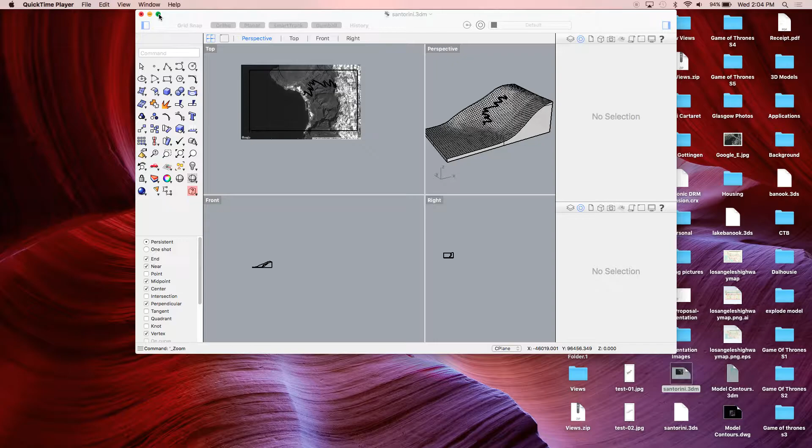Okay, may as well get started here. Did anyone have problems yesterday with their terrain, or did they make their terrain? Anyone? Yeah, it works, ish. We made something, we don't know if it's right or not.

There was another point I should have mentioned too, that might have helped your terrain be a little more accurate. Just to get those edges coming down properly, you could copy all of your points down, whichever increment you have for your elevation changes. Copy them down one more time so the points go down like that instead of just from there to there, because then it has more of a path for the actual patch to go on. So if your patch wasn't working out properly, just try doing that.

For this one, I made a simple model of Santorini because it has quite an elevation change. I put a path in there just so we can see how to move the path into the Illustrator file for the laser cutting.

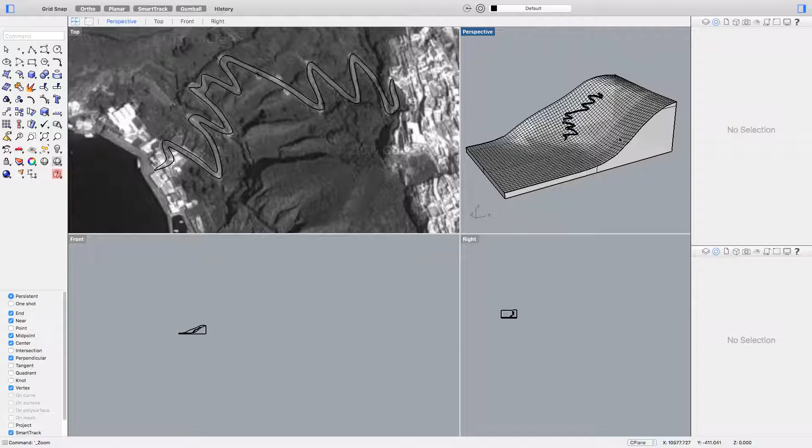So first, we're just going to do the manual version of it for this elevation change. Obviously I'm going to make it as simple as possible, so you'll get fewer actual stacks of material, but when you do yours, keep in mind it's probably not great to have huge changes in between your material if you have really thick material.

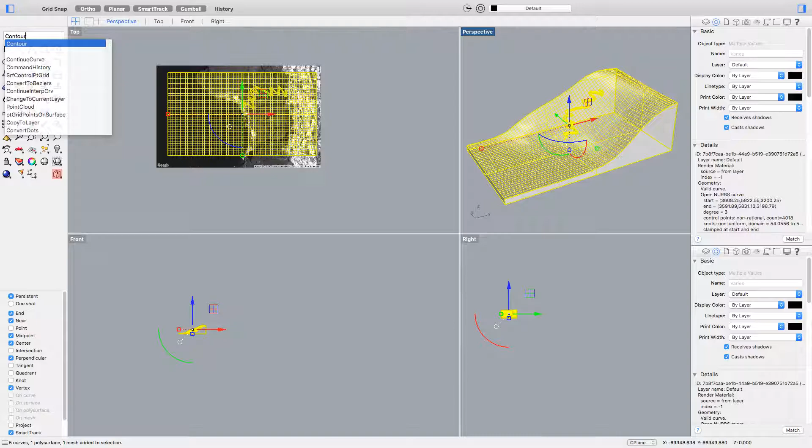So just like yesterday, pull the contour command out, and put in the direction, so you're going from top to bottom or bottom to top. I'm making these at 1,000 millimeters. We can change the scale in another program. I'm just loosely going off of what I know this model is scaled at, so that we can pull off curves into Illustrator.

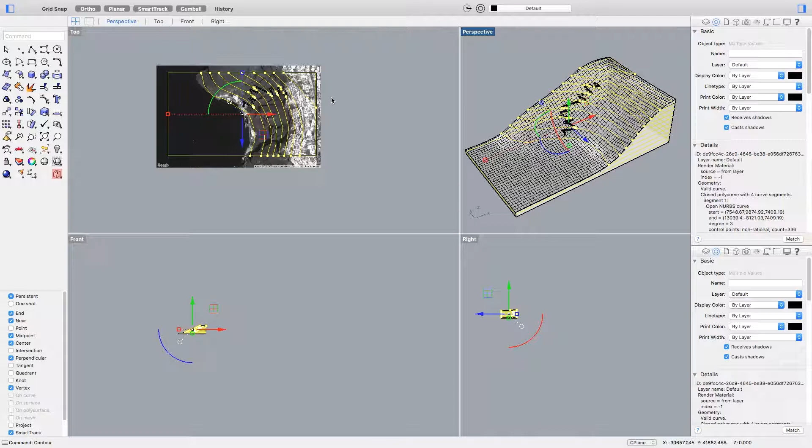Now I have each of the contours, which I'll move over using the gumball. All of these contours have now... okay, never mind, let's try it again. Did it just crash? It just crashed. Not sure why, I'm also using the trial version and it's kind of shitty on Mac.

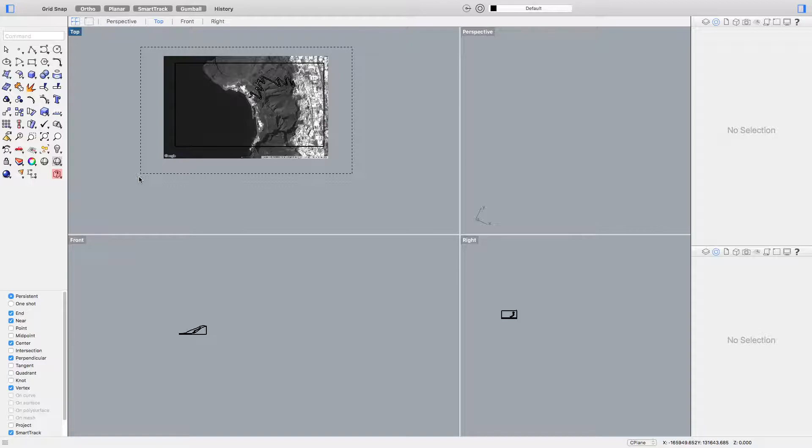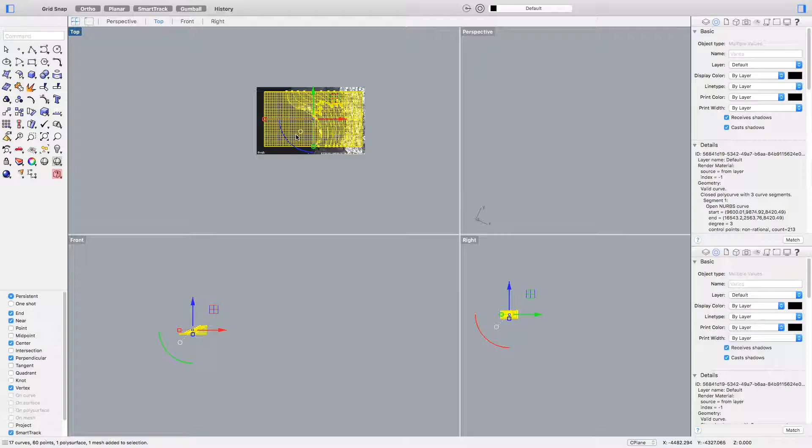Okay, contour. Oops, oh my god, that's gonna be bad. Sorry. Okay. One more time. Did it work? Yeah, okay. Have a bit of time.

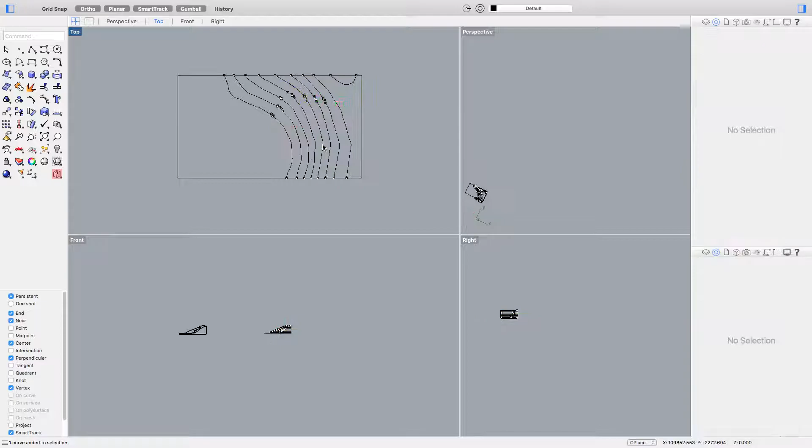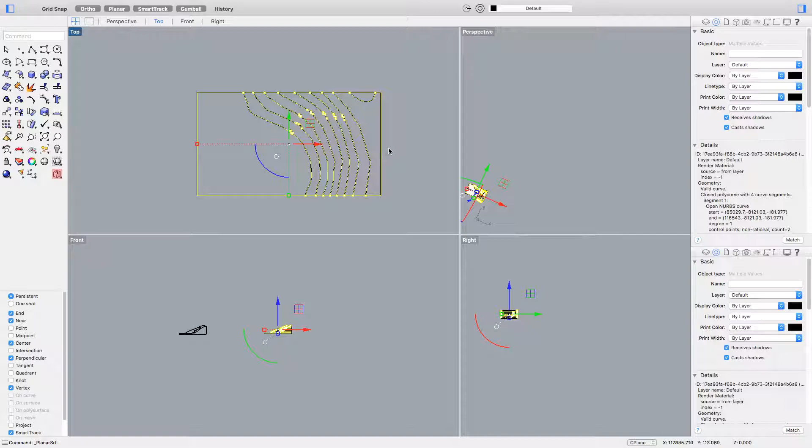Alright, so now we have all of these contours in their separate pieces. In order for me to take this little pathway I've created and project it onto these pieces, right now they're just lines and curves, so there's nothing to project onto. So I'll select all of these contours and change them into an actual surface. If you go to Surface and Planar Curves, it changes all of these into separate surfaces.

So then if I take this curve and move that over the same distance, I can project this. Now when I project this, the only problem is it's going to project this line work onto every single one of these layers, which we don't necessarily need, but in the end it will help us line everything up. So, project, select all of the surfaces again, and you can see it's projected that road onto each of these separate surfaces.

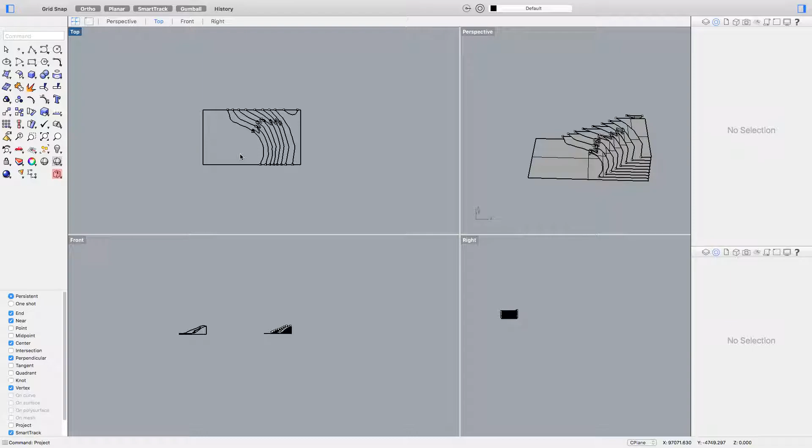So now essentially we have each of the pieces that we're going to be laser cutting. It's not that hard to move each of these because there aren't very many, but if you have a file with a whole bunch of contours, there's an easy trick to spread them all out so you can actually use them, which is the shear command.

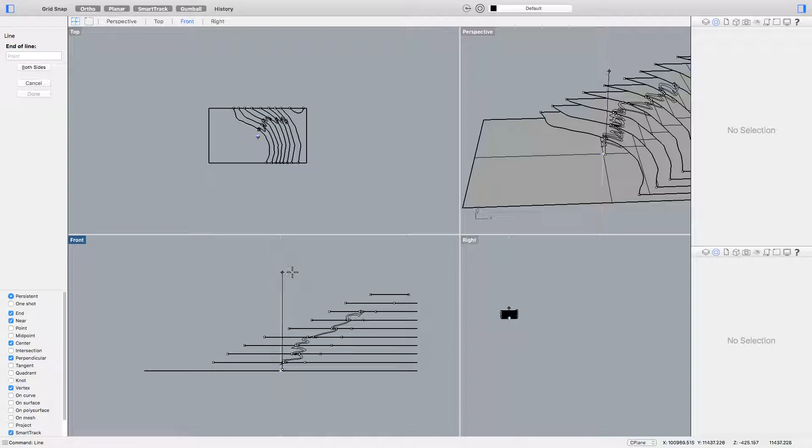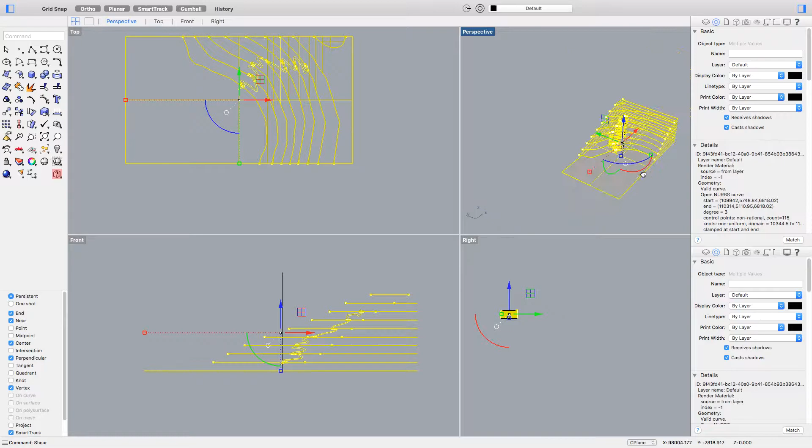But first, just draw a line from somewhere in the center of the project, straight up, and then grab everything but that line. Type in shear, and grab the base of that line we just created to the top of it. Oops, sorry. Oh my god, okay, this thing's a little finicky. So let me try that again.

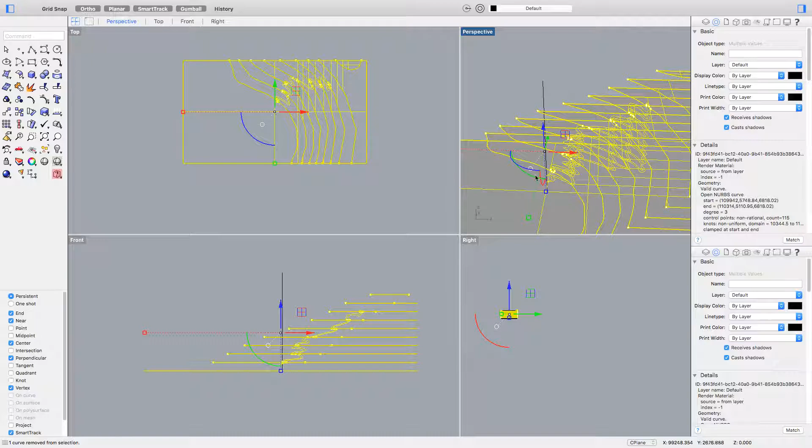So what this command is going to do is take everything on each of the z-axes and spread them all out. So as long as everything is on a level plane, it should spread all of your separate pieces out.

There we go. Okay, so that's just the curve. This one's the one that we used before, but we don't need that.

Now you can see each of your panels that we're going to be cutting. This is the most basic way that you can spread out all of your pieces, and then we can start laying them out onto whichever format of material you guys are using.

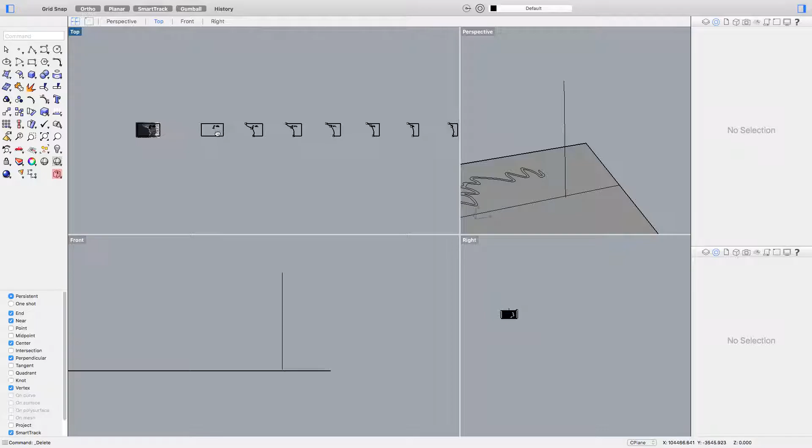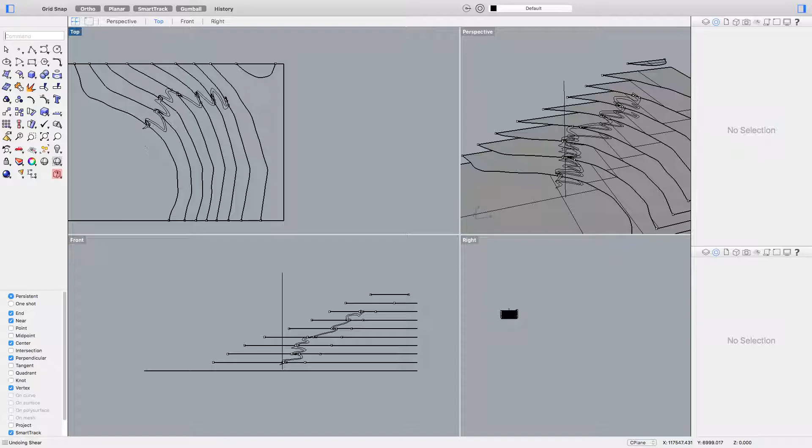One of the things that would probably help you guys out is, I know a lot of you talked about putting reference points of where each of the layers stack on top of one another, or even if you don't want to take this whole piece and cut out the entire piece, and you want to kind of hollow it out underneath, just go and project these lines or these curves onto the surfaces below.

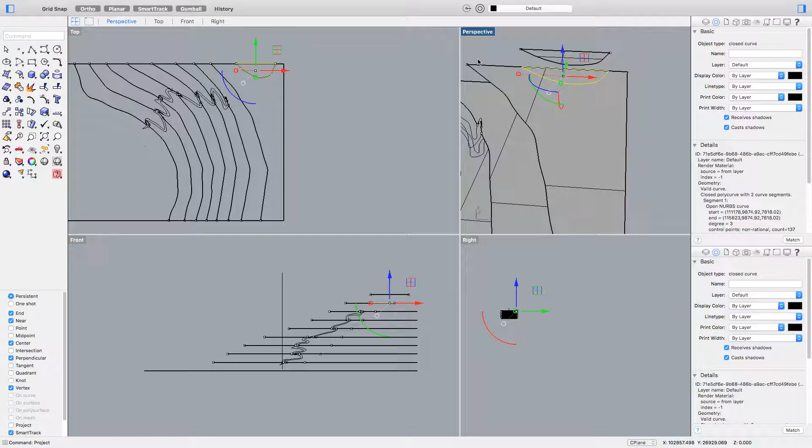So then once we actually get into the file on Illustrator of all of these, we can change these layers and just do a slight laser etch instead of a cut through the entire piece.

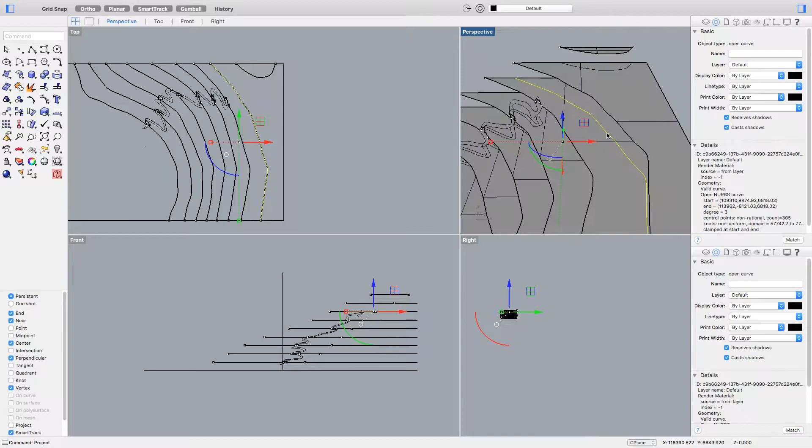So if you were to go down and do that, you can keep going down and do that on each separate layer. I don't want to do that because it's time consuming, but you guys get the point.

Does everyone know what I mean for that? Yeah, okay.

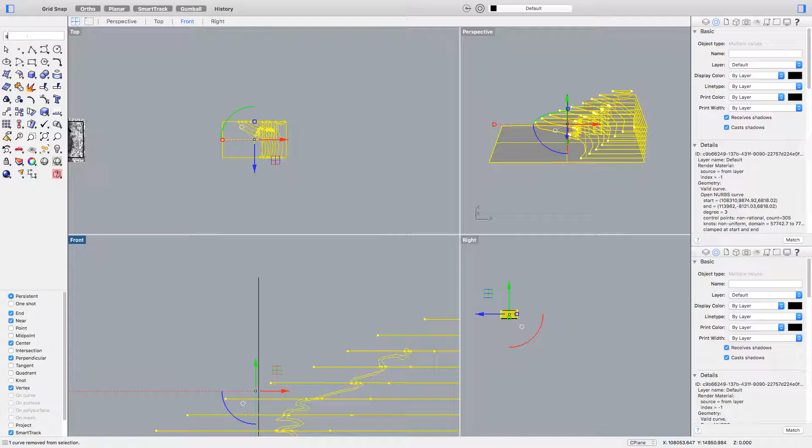So we'll just spread those out again. When you do the shear command, does it keep it at the same Z height? Yeah, it keeps at the same Z height, which won't matter when we export this to Illustrator. It just flattens it anyway, so that won't matter.

Okay, I see. Yeah, so it doesn't warp your line work or anything, unless your line work is going down the z-axis, which we can see that one path was actually going down the z-axis, so that was all warped, but we don't need that.

So we have this one, which will allow us to place, and this one, which we can place. So if you guys want to actually do that with your models, that's one of the ways that you can.

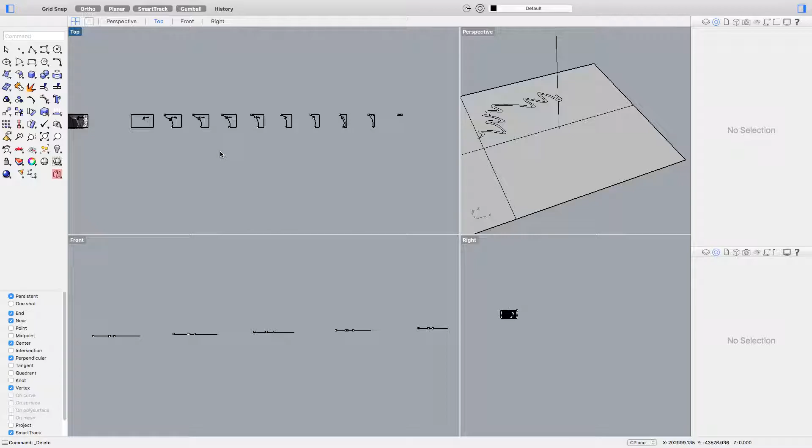You can do it one of two ways. You can start laying out, people lay out and just make their framework for their material here and start placing each of the pieces. I prefer to just do that in Illustrator, but however you want to do it.

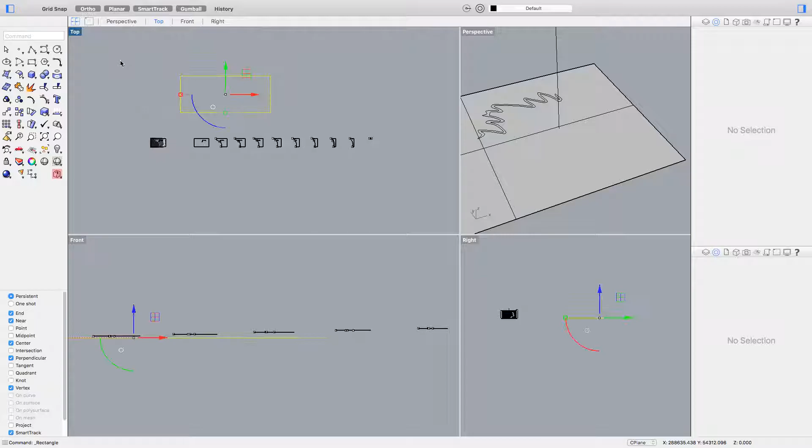So I'm just going to go and export. It's different on this guy, but if you can export the selected geometry, there we go. And we want to export it as an AI file for Illustrator.

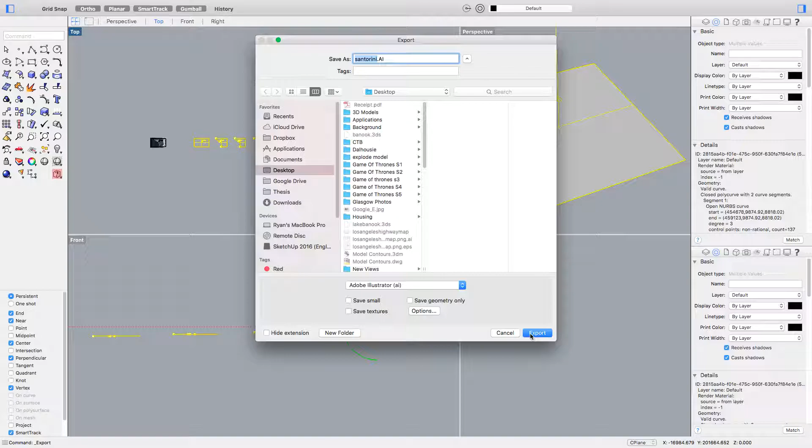And we want to keep the same scale usually. Well, you want to scale it in your head. I haven't scaled any of these, I'm just kind of guessing all the numbers, but typically I'm going to scale it for the type of model I'm making. So if I'm going to make a 1:1000 model, I'm going to change it so that there's 1000 millimeters, or whichever it is.

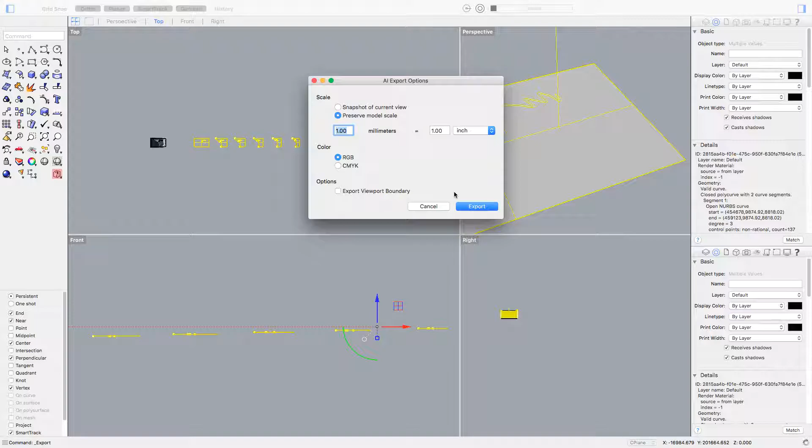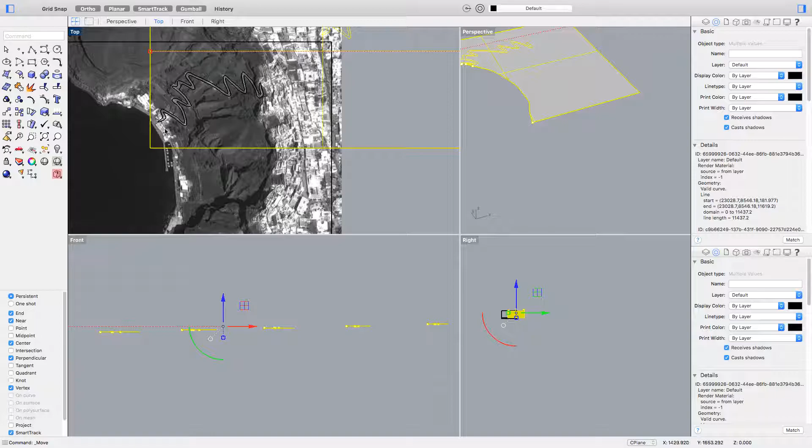Also, one thing I find about doing it this way is that you should probably put the panels closer to the corner, just the bottom left corner, because otherwise it'll disappear somewhere on the artboard in Illustrator and you can't find it. So if you just go move and then move that to 0, 0, 0, 0, 0, then that's the true 0, so it's going to actually export in the correct place when you go into Illustrator, because it does float off the page.

And you may even want to take some of these panels just so it's not extending across the page, because Illustrator also doesn't like that. Okay.

Anyway, so we'll just export that. So you guys got that export selected?

Okay, so then if we just head into Illustrator and open up our file that we just made.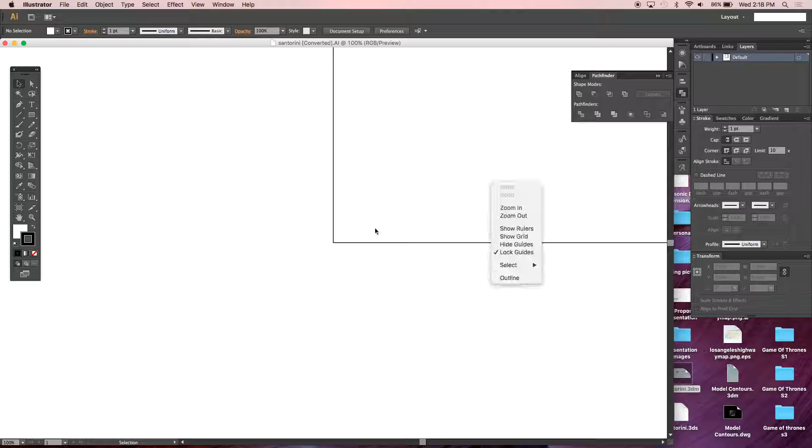As you can see, they're enormous, so we're gonna go back and export something else, because this probably isn't going to work. Well, you know, you can always try and scale this down in Illustrator, but it'll always say that it's gonna fall off the artboard. So you pretty much have to go back into Rhino and redo the scale.

Hey, it works for you. No, I don't think it did. Okay. No? No. Okay. Yep, so let's head back in here, and we are going to rescale this.

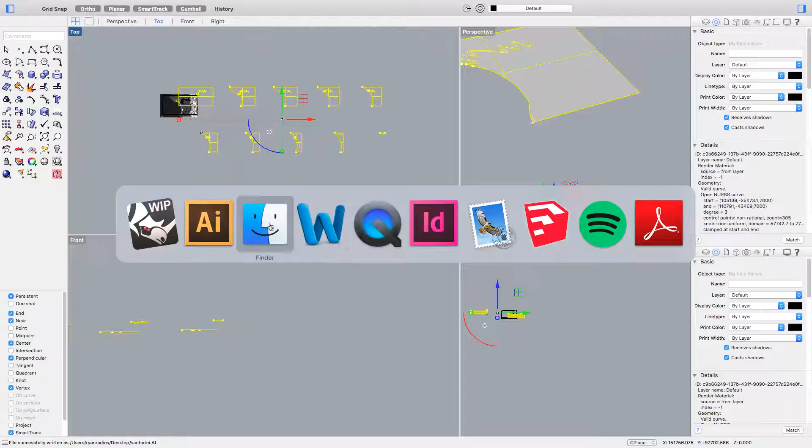Might have done that backwards. Okay.

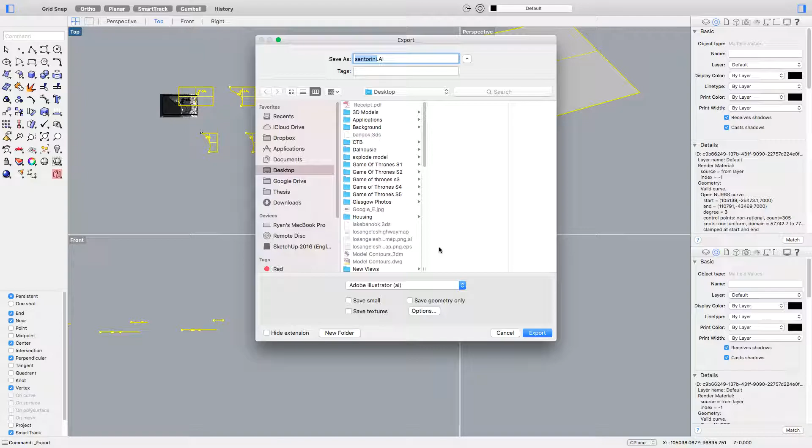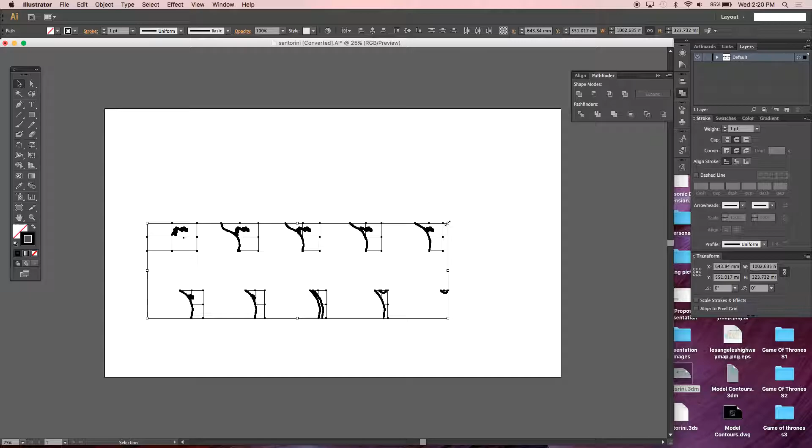There we go. So now we have our super small pieces. But at least we can scale them up this time. Again, I'm not doing it to any particular scale, which is the wrong thing to do, but it's just quicker at this point.

So the first thing that will actually probably help is, so the one laser cutter, the old one, you're supposed to have your sheet, your artboard set out to 32 by 32, even though the bed's 32 by 18.

It just prevents a lot of errors. So if you just go into the artboards and change that to 32 inches by 32 inches, and then you can always pull your guide down, although this is in metric, so somewhere in the middle, yeah, say that's 18.

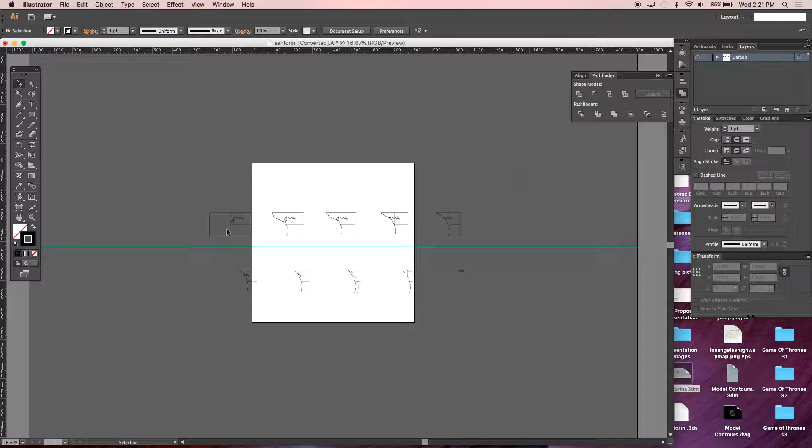So now we just have to manually move all of these pieces around. What you probably should be doing is this in Rhino, because it makes it easier when you pull it into Illustrator. It's not the end of the world though.

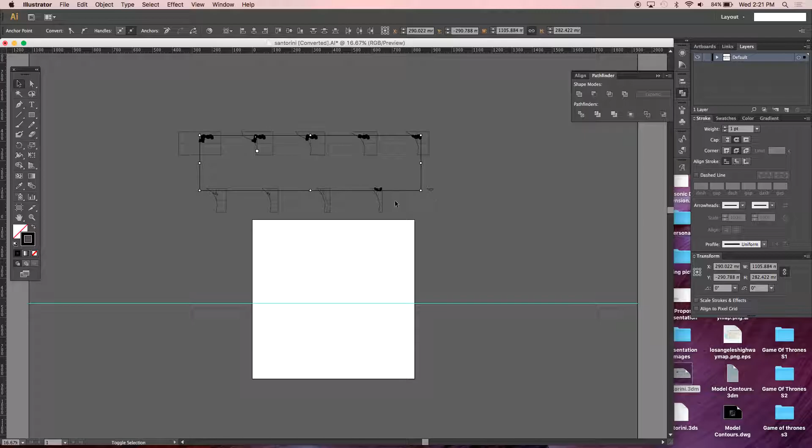These are things that you're etching. So each of these paths, we're going to need to make them a separate color because that's how the laser cutter works - it works on color. So I'll just grab each of these. This is assuming that we don't want to cut the roads out.

See the layers panel? Oh, it's right there. So you don't necessarily need to create a different layer for that, you just need to change the color, right? Exactly, but I like to have everything in separate layers just in case you need to turn them on and off. True. But we'll just change that to path and move those to that layer.

So now all of these are on a separate layer and we can actually change the color of them, which is what we'll need to do anyways. They do need to be true colors.

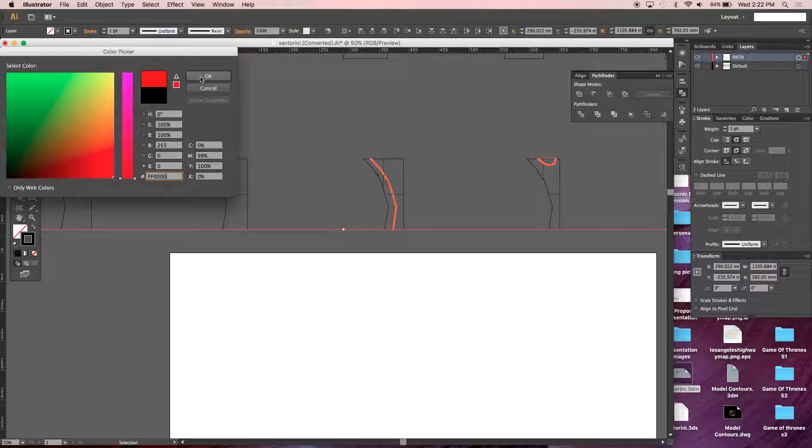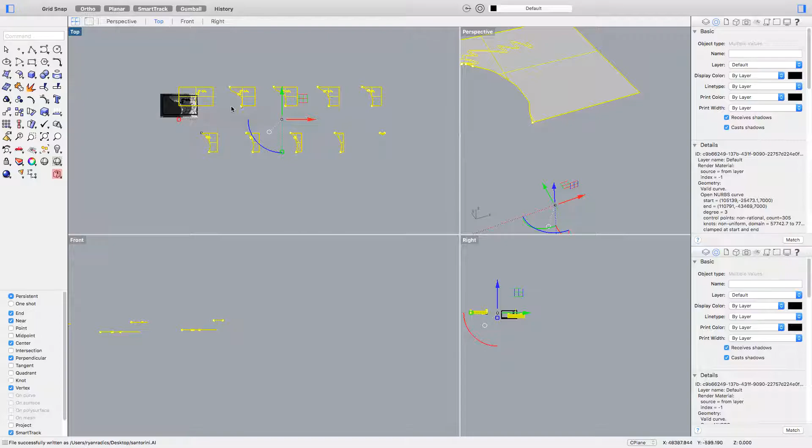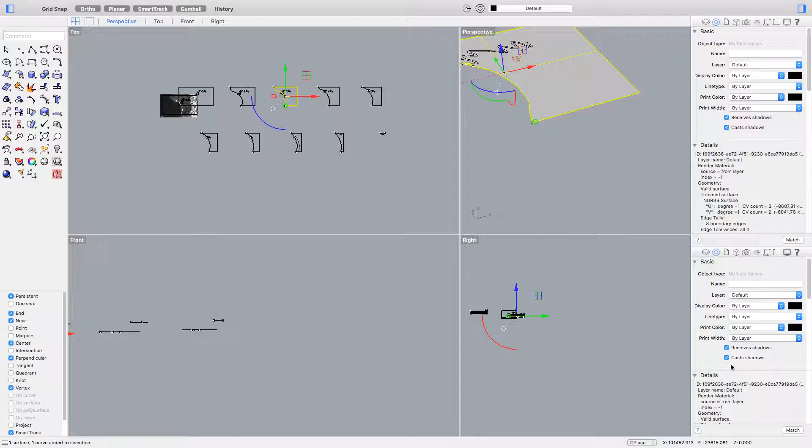In our file that we made before, because they were planes, they just have these ISO curves on them. That's another thing you should be doing in Rhino - when you have all of these selected, if we just select one of these, there should be a thing. Where's the ISO curve button? Okay, maybe not in this version. In the PC version, on the properties panel, there's a button around here that lets you turn off the ISO curves so you don't have to manually delete them.

Oh, that's from it being a surface. Yeah, okay. I guess conversely, at that point, you could delete all the surfaces that were in Rhino and export it without that. Yeah, you could do that as well. Either or - actually, just double check that.

Yeah, so Kat's probably right, we should have done that, because when we're bringing this in, now we have double line work. It's just because I had the curve that I brought over and the surface. So if I didn't catch that before we actually cut it, the laser cutter would pass by twice, which we really don't need.

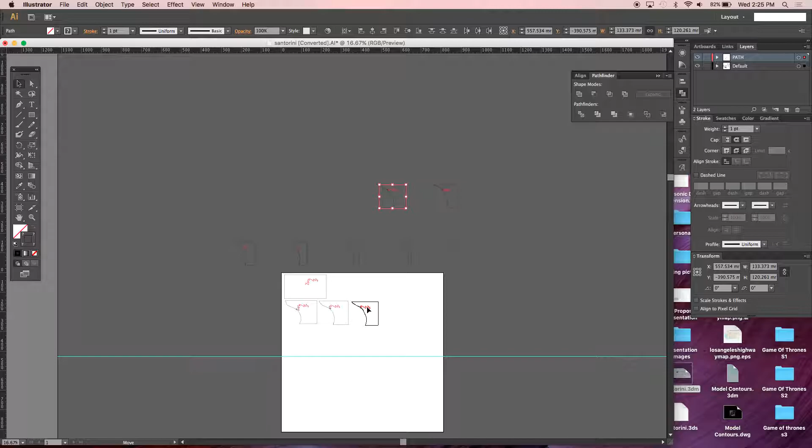So basically all the rest of this is just manually moving each of these pieces around so that you can fit as many of these pieces onto one artboard as possible. While doing this, it's pretty easy with these because they just get smaller and smaller, so you know which ones are which. But if you have a really complicated model that goes up and down in different directions, I'd recommend putting numbers on each of these - that helps a lot.

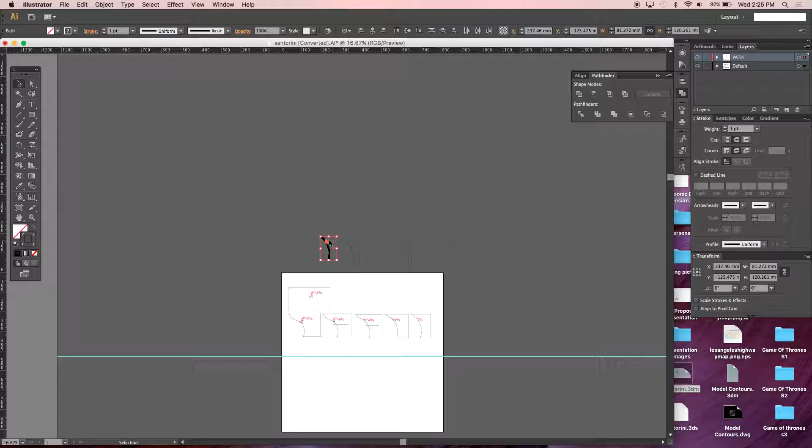But let's say, actually, move this on down. So we definitely have enough room to make all of our pieces on one 32 by 18 sheet. Okay, so we'll just save this because we need something to cut on the laser cutter later.

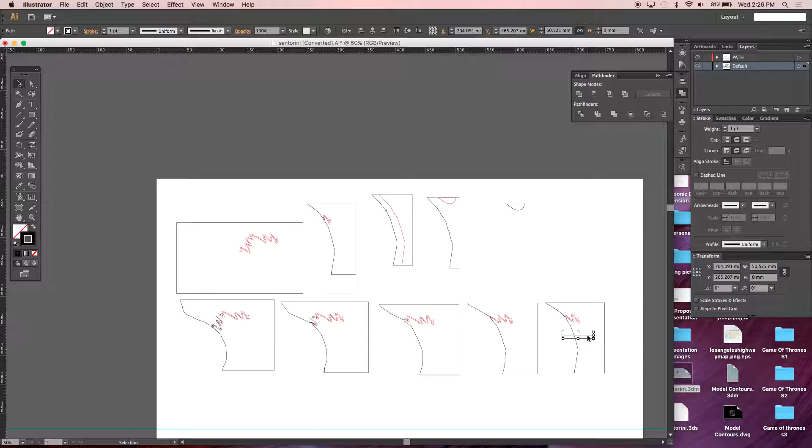This isn't being very precise, but close enough, right? Yeah, for the purposes of what I'm doing right now - don't ever do this for your actual laser cut. Okay, and then just label them if you've got an intricate model. So say for instance this piece, we know this portion is going to be the only visible side - we can put the number on the other side so that we cover it up with the other panel.

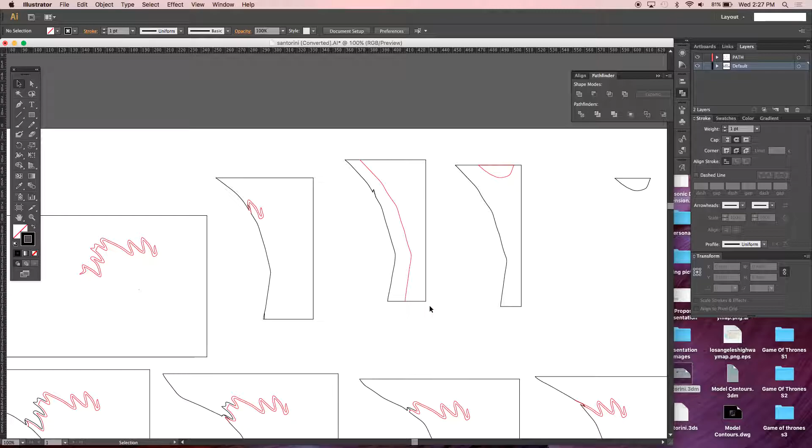What you could do as well, I should have shown you - if we kept going down with all of these lines projecting onto the pieces below, a good way to do it, if you want a hollow model instead of cutting out each piece in a huge stack, is to project two of the previous layers down, use one of the lines as the red line to line things up, and use the other line to cut so you have enough material to glue together.

So the other thing the laser cutter needs - I know the old one does, not sure about the new one - is it has to be at like 0.001 or 0.01 line work, otherwise it won't recognize it.

And just save it as an Illustrator file because that's what it opens up as. So we'll just save that. I think on the new one it has to be back-saved to CS3. Right, so when you save it, the other one does as well. So when you save this, just save as normal, replace, and go into Illustrator here and back-save.

Okay, and then basically we have that file that we're going to be cutting. That was the manual way of doing it, and that took about a half an hour with a very, very simple model. So it's a little time consuming.

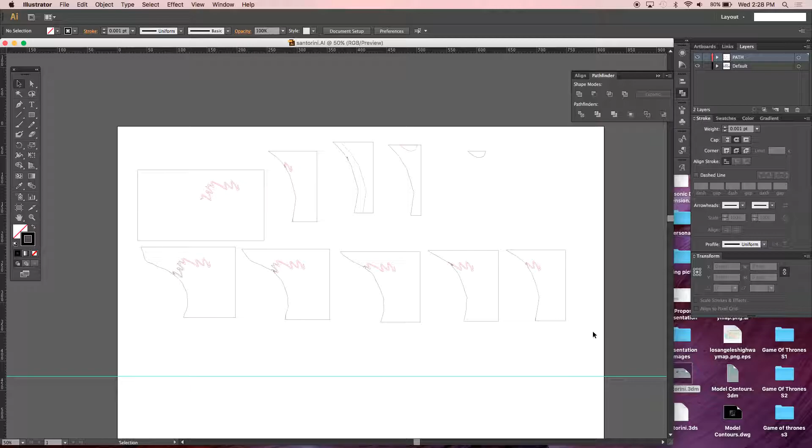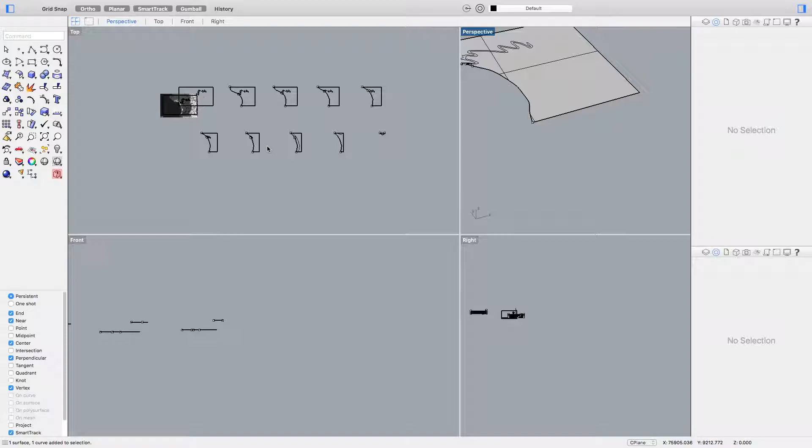If any of you are working on the PC side and have your own Rhino version, there's a plugin called Rhino Nest. It basically takes all of these slices you've made and automatically nests them into laser cutter panels that you set up in the program. There are tutorials online you guys can take for that, but that's also a simple way of doing that as an alternative to this and an alternative to the next method I'm going to show you.

Do you know those tutorials right off? If you just Google 'Rhino Nest contour tutorial,' it should pop up pretty easily.

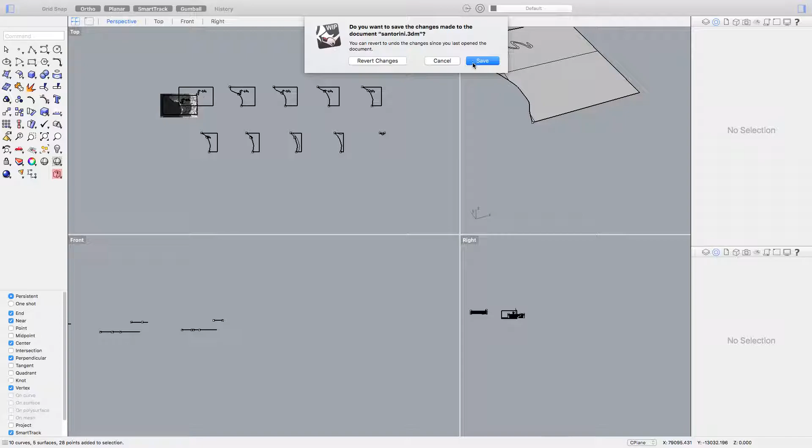Let's say that model is 2 laser beds wide. Is there a way to split that? I guess the file you brought in yesterday was our entire model, and that's 2 laser bed widths. So if I do that same thing, sheared, lay it all out, then I've got essentially my entire model. Is there a way to cut that in half? Yeah, just like the other commands we kept doing with the project, slice it right down the middle with project, and you'll have those 2 perfect squares, and then they can just come into one another.

Yours should be fine because you have the lake that's almost right centered, but if more people have tiled panels, you can just go ahead with the project command and separate all of your different panels that way.

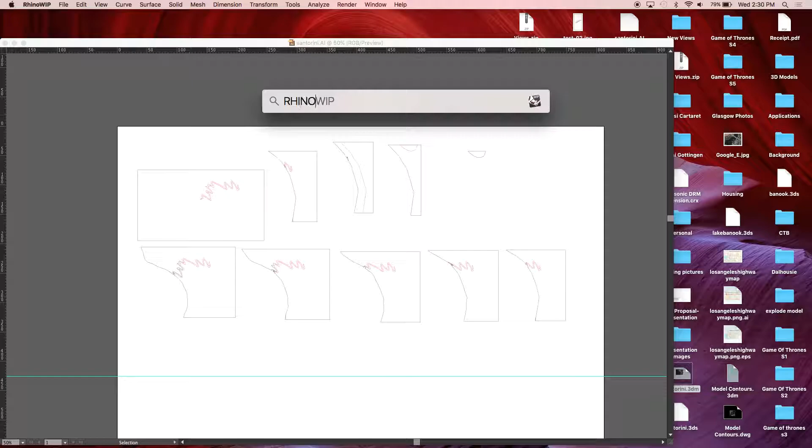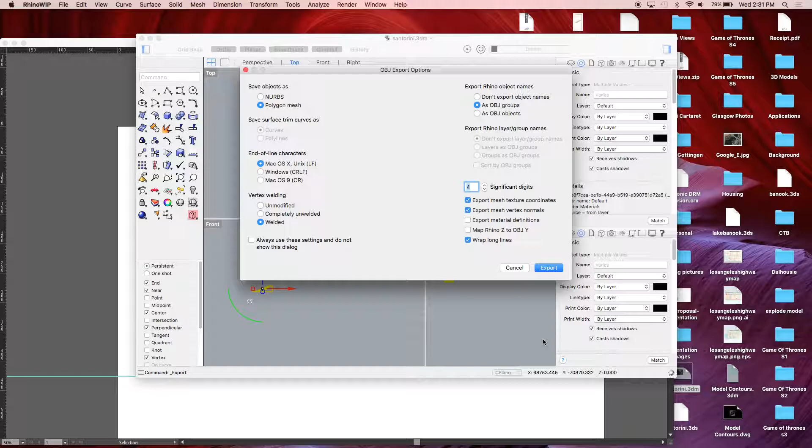For the other way I'm going to show you, you need a program called 123D Make. It's free online and part of the Autodesk program. For this, you need to have an OBJ, so you can save or export it as an OBJ file - just the model itself that you've made, so the terrain and the block of it. That closed poly surface we talked about, that's what you're exporting as an OBJ. It also accepts another type of file, but I forget what that is.

So this program's pretty simple. It's a bit finicky and a little problematic, but the amount of time it saves you if you have a complex model is definitely worth it. So you just go up here to import that OBJ we just brought in. And there you can see our model right there. Then it gives you a whole bunch of different construction techniques that you're going to send to the laser cutter.

Actually, first off, we should probably figure out the object size. If you just bring it in - I think we were in millimeters in that model - so if I change it to millimeters and original size, it's going to be absolutely enormous. But you can go in here and manually change everything as well. So let's just go like this - height, and I don't know. The material we're using, I forget what Damon said, but it's 1/16 of an inch thick. So I can just guess that I want this model to be, I don't know, 3 inches high.

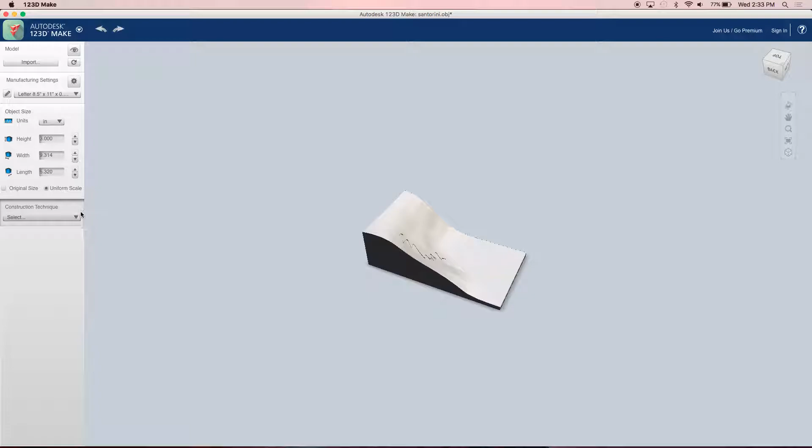Alright, there's our super tiny model. So then again, we can select the construction techniques. It can do a whole range of techniques to cut kind of a grid shell pattern of it, or whatever - you can change the degree that you're cutting these slices at. But for this, we just need the stacked slices. And then it takes all of the slices you need and automatically puts them onto sheets for you.

But right now it's only putting them on letter size. I have the laser bed already saved on here. And then right now I have it set to a very thin paper, but we need 1.5 millimeters, which is still a lot.

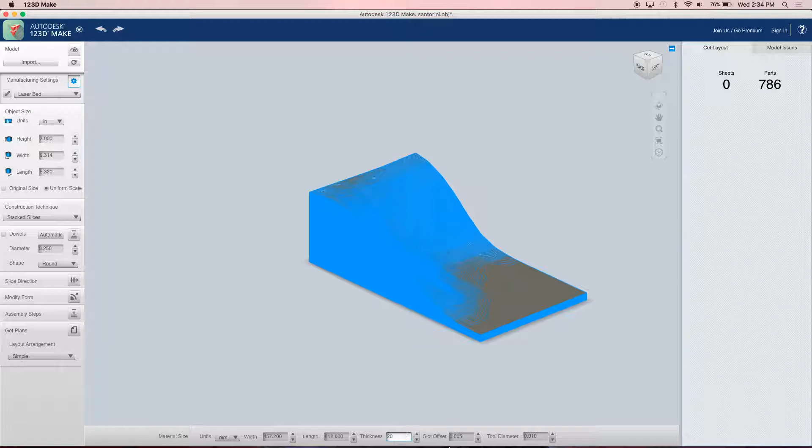Let's just bump this up to show you what it would look like. Let's use 20 millimeters. Ooh, 10. Maybe 5. Okay, so you can keep playing around with that and get something that you like.

It automatically numbers the layers for you, and then shows you the line of the previous layer. So we're pretty much done here, and it was really that easy.

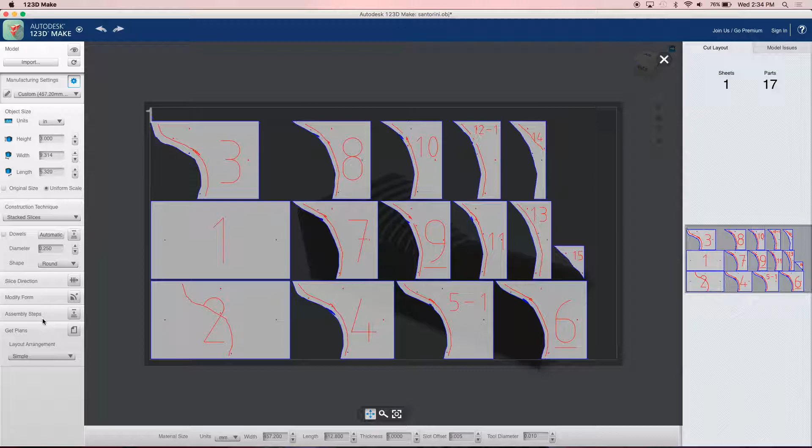But you can play with the settings and change which material you're using quite easily. I forget where it is in here, but if you play around, you'll see why number 2 looks kind of weird - there's 2 of these layers that get stacked. Technically you don't need number 1, so when this pumps out, you can just erase number 1 from the sheet so it doesn't cut it.

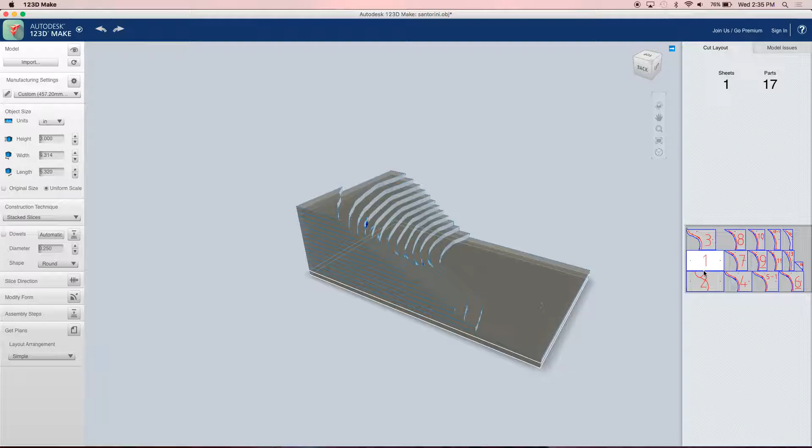Actually, I don't know if we can do it in here. So we just go to the simple layout, click this button, and we can export it. We need to export it as EPS or PDF, it doesn't matter. We're going to open it in Illustrator though, just to make sure everything's in order.

So the contours that it cut look pretty janky, like number 8 has some issues. When I made the model, I was going to show you guys a whole bunch of thinner layers, but we just don't have time for that. I actually cut the road out of the terrain so it was more like what you guys were going for, so you could place a laser cut road on top of it. Normally you wouldn't have that, but it was just the model we were working with. It's technically supposed to be like that.

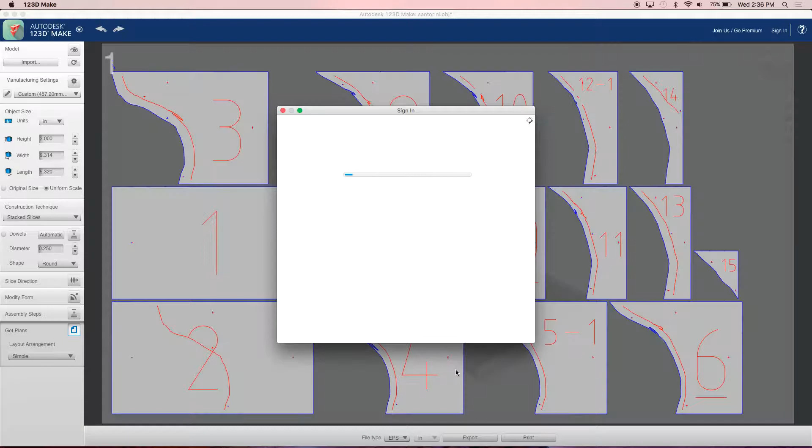Anyway, so export it as an EPS.

You have to sign into Facebook to use this. Well, you can sign up for an account. This was just the easiest one that I used, so do whatever you want. I don't care.

It's just a free account, and once you have it, you can save your models so you can go back. If you ever run into a problem, you can go back and actually see what piece is missing or what piece messed up.

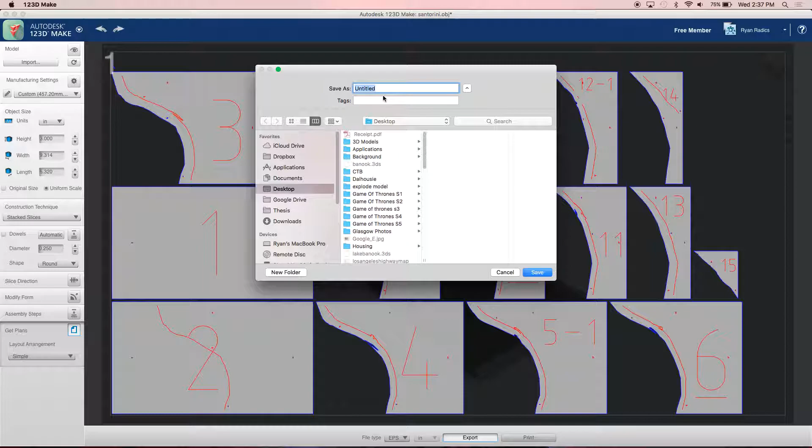So do you have it saved so that it automatically moves everything a half inch in for the old laser cutter?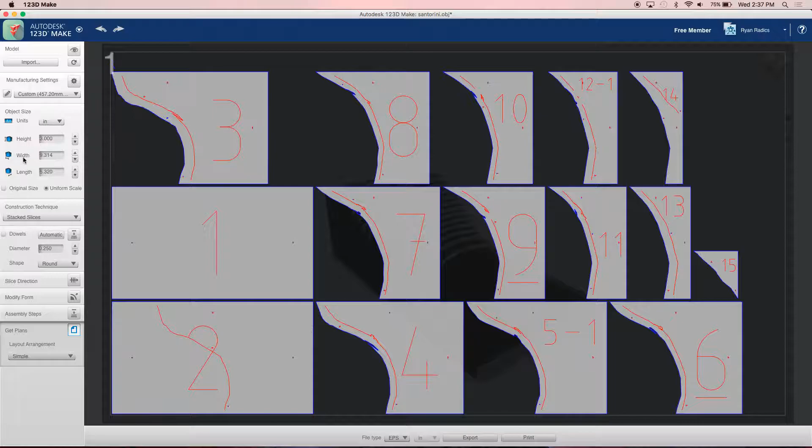On this, you can go back to your template here - where was it? Wouldn't you just make the laser bed dimension half inch smaller than 32 by 18, and then that sheet it would be setting up would inherently be correct?

You could, but there's margins on here, and it's super easy to change. The other laser cutter actually cuts properly and goes right to whatever margin you want. But it is in here, in the settings, I think. There we go - yeah, so you can change all your margins here.

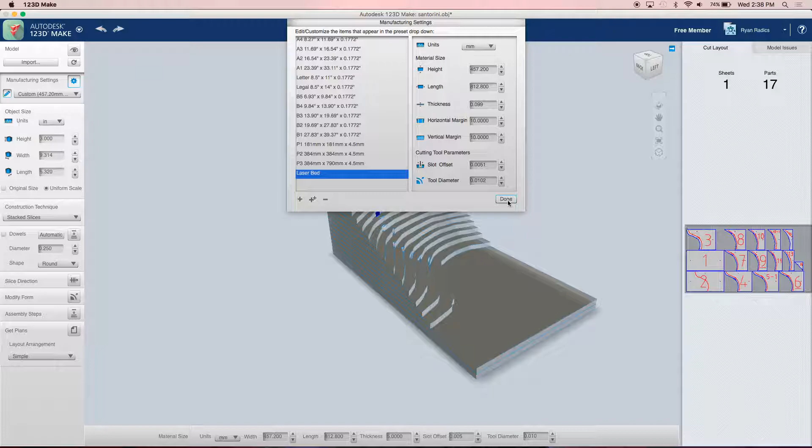Right now it's at 0.2 of an inch. This is the setting for the laser bed - the margins are huge on it. They don't need to be that big, but we fit all of our pieces on the one anyways, so it doesn't really matter. That's just required for the old laser cutter.

Not really - we're going to be taking it into Illustrator right now, and we can put it to whichever corner we want. The new laser cutter has a computer program that allows you to zoom into which area you want laser cut, whereas the old one is just offset for some reason and cuts in a weird spot.

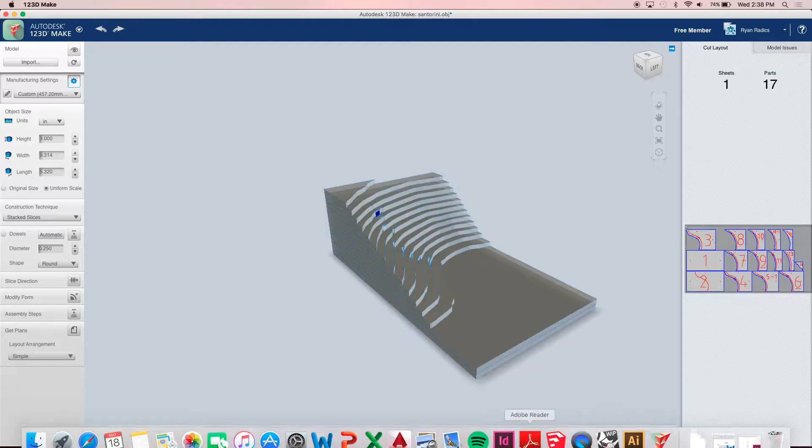Do you lose any quality by using this? Yeah, you probably lose a little bit of quality, but it depends on how many layers you're doing, like what the increment is. But in general, it's even picking up these little roads that I had before, which it should. So I wouldn't say it's really losing any quality, especially for what you guys are doing. The amount of precision needed isn't actually that much - no one's going to notice that there's a little rock missing or something.

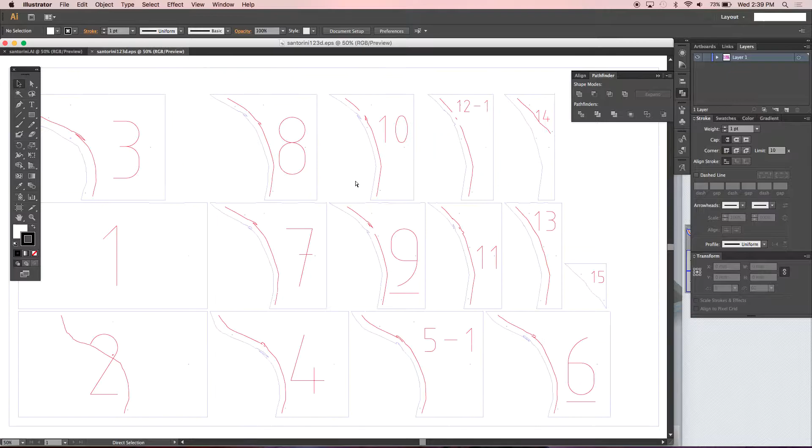So when you go back into Illustrator and open this up, it's already labeled everything. We just have to make sure... change it back to the bed size, or 32 by 18, sorry.

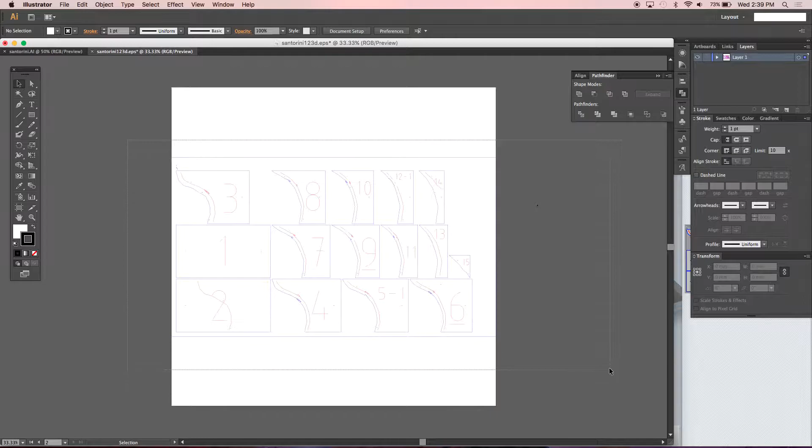And the border that it has on here is already at 32 by 18, so we know where that is. If you go and ungroup everything, you don't need this line, otherwise it's going to start cutting it. So we can just change it to all black.

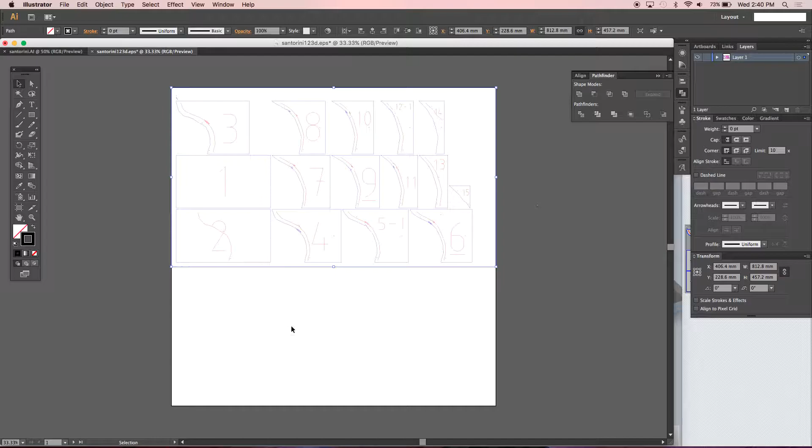And then each of the other ones, you just need to double check that they're true red or true blue, which this one is. Yeah, we're fine.

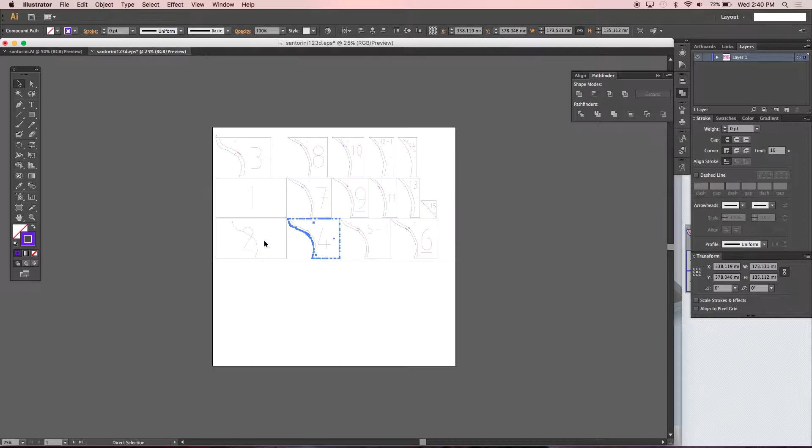And again, just make sure that the stroke is all 0.01. The old laser cutter sometimes has a problem with that. It has to be in RGB, I think, for the old laser cutter.

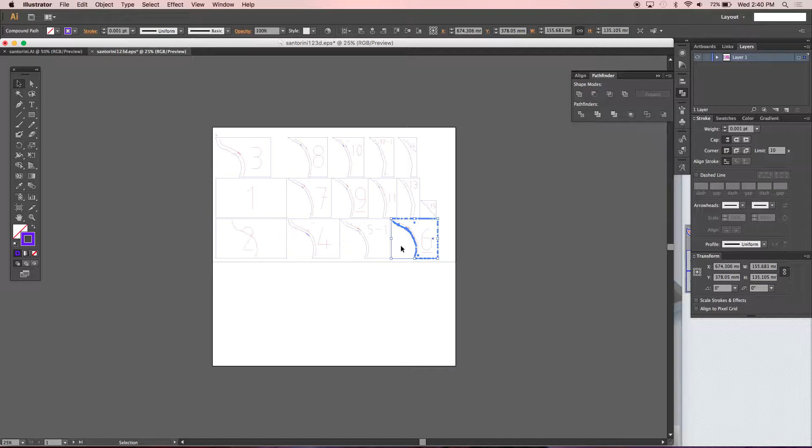So when you save it or down-save it, if it isn't working for you on the old laser cutter, you just have to make sure it's in RGB, which this one is. So it would be fine.

So save, and again down-save that one.

So in comparison, you're looking at half an hour versus 10 minutes. You guys can choose whichever. This one, I guess, yeah.

Running through this one, the only problem is that it doesn't have the roads or houses or anything that you can project on there. It'll just take the actual form itself, so you're missing out on that portion of it.

Obviously for this, you would want to separate it and move that piece over, because I think it'd be hidden, crossing the line. This is where cutting that off, the other piece would be over top. The other piece goes over top of this part, but then it would still be sticking out.

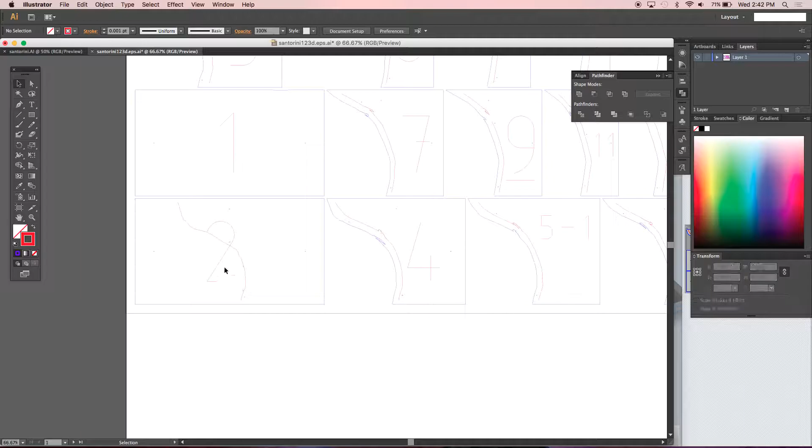But yeah, other than that, it's fine.

Any questions? Why does it say like 5 minus 1 and 12 minus 1? Because some of the pieces have 2 parts to them. This one, I'm not really sure what would be in 2 parts, but I've done complicated models where it's on the same plane, it's just 2 different parts. This one shouldn't have that.

Yeah, so it's like it's 5, 5. So that's...

And so, if you are etching the houses on, do you put those on a different layer or different color? I would probably put them on—depending if I'm going to actually cut out the footprint of the building, I'll either have them as blue for cut or red for etch.

But that's something you would only be able to do in the manual portion of it. You wouldn't be able to do it on this quick program, which is kind of unfortunate. Well, I guess you could if you modeled the houses and they all became part of the solid, but that's still not really that accurate.

Yeah, so they were talking to me yesterday about wanting to do that and have the buildings a different material than the landscape, which works. But if you guys decided that you wanted the buildings and the landscape all in one, you just put it all into one big closed poly surface, and then it'll cut out the houses with the terrain.

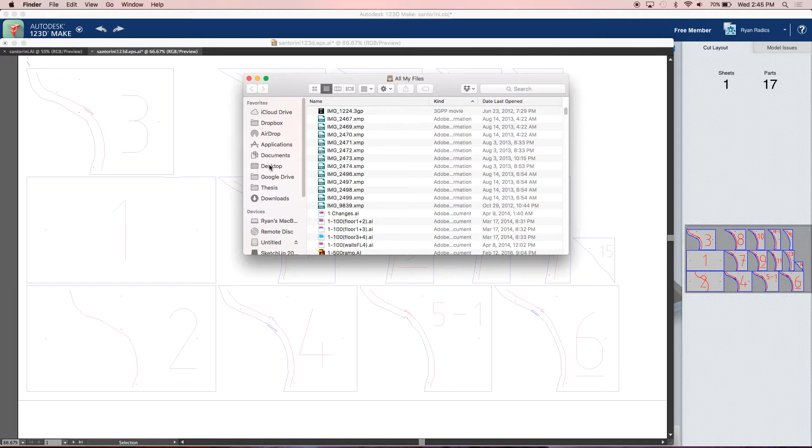Oh shit! I think I saved this one as an EPS file. Or did I? Oh no.

Are you all ready for us, Damon? Yeah. Okay.

You said we're just using the big one? Just the big, or the new laser cutter, sorry? Yeah.